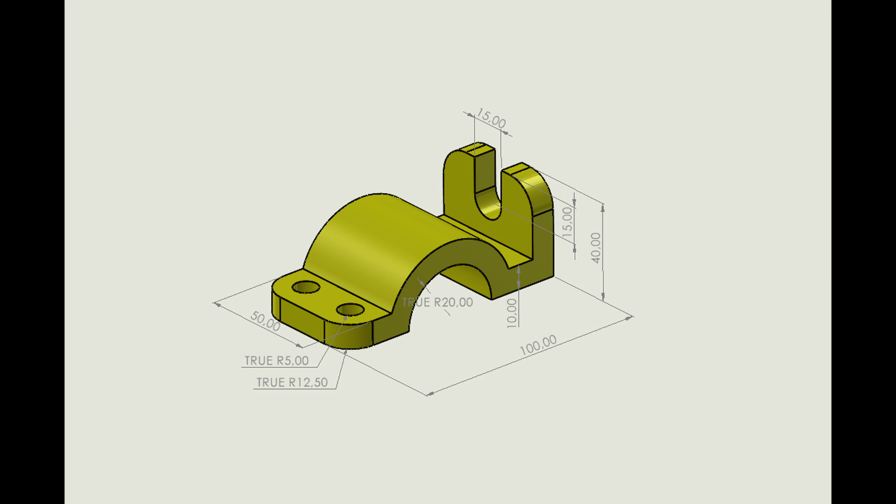In this lesson, we will model the shape shown in the visual and learn 2 new commands.

We'll start by sketching on the front plane to create the base shape. First, I draw the circle and the lines around it.

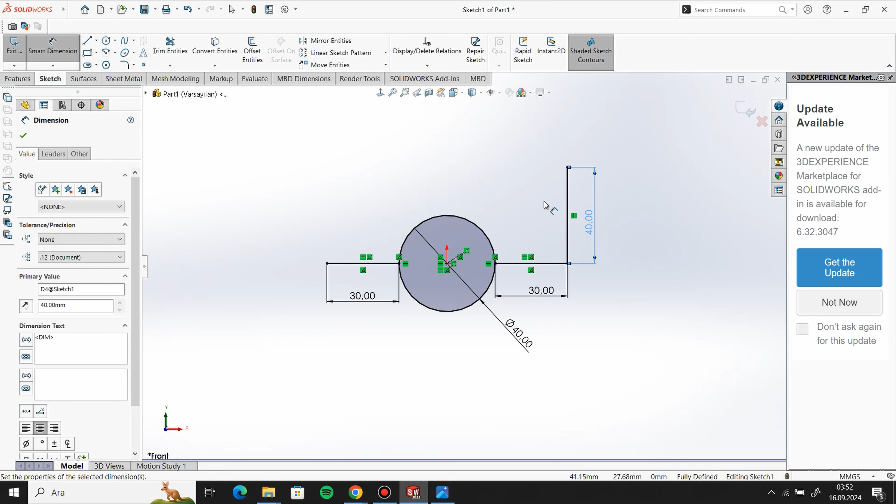There is no need to draw the upper part separately because we can use the offset command to move the lines. I click on the offset command and move the lines by 10 millimeters. I close the gaps between other 2 lines.

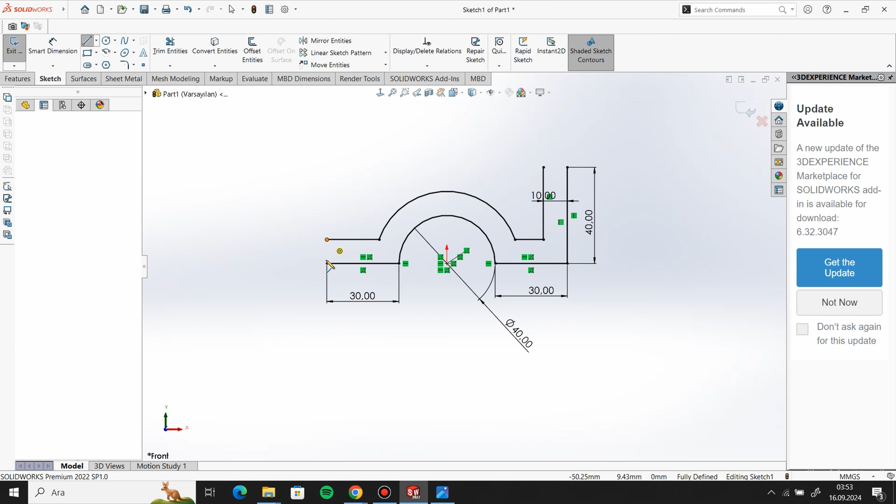Use the extruded base command, give volume to the shape, and choose the mid-plane option to keep it centered. I also set the dimension for volume.

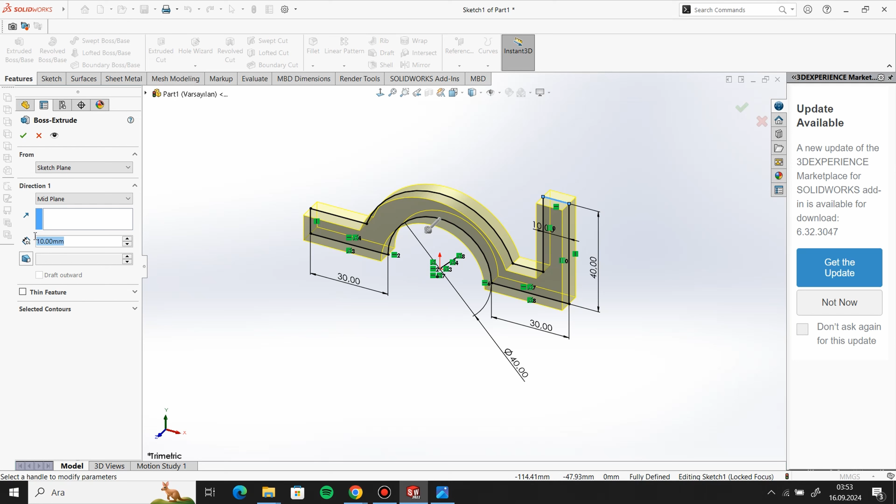Next, we will round off the corners using the fillet command. I enter the radius value and select the 4 edges to smooth them.

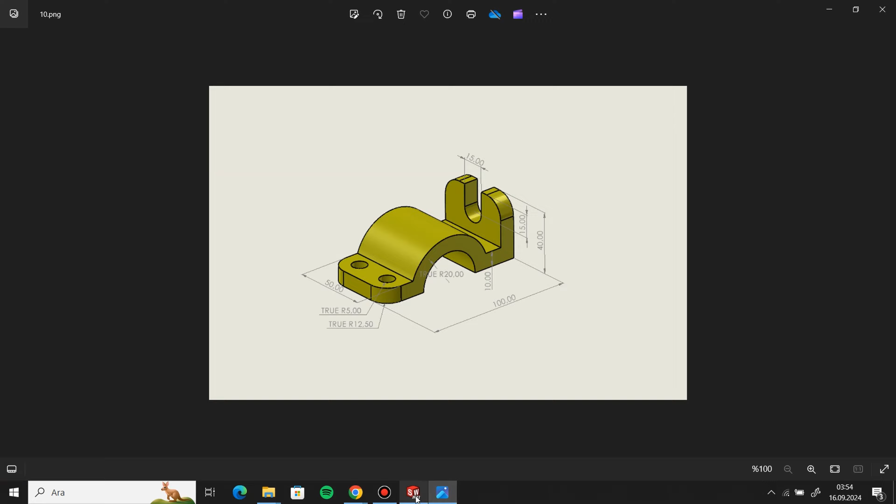Now, let's create the holes. I click on the sketch command and select the surface of the model. Then, I choose the circle command. To align the circles with the arcs, I hover the mouse over the edges, and the center points appear. After drawing the circles, I dimension them.

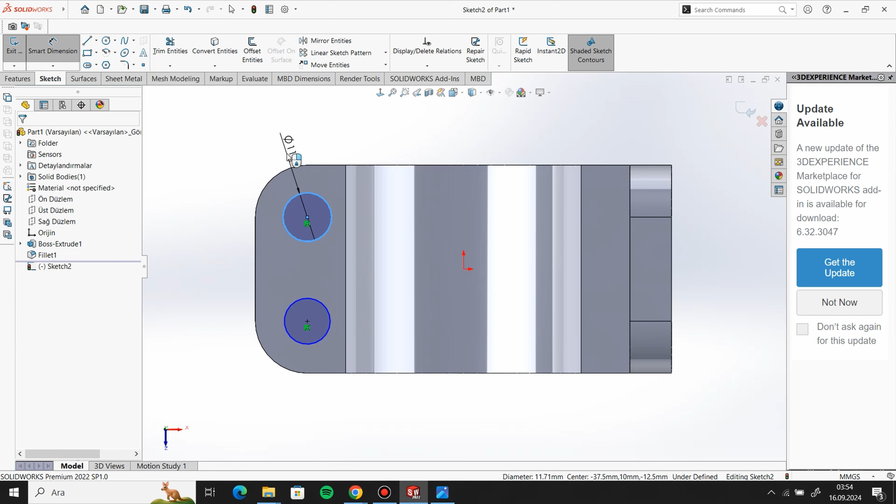I use the extruded cut command to create the holes.

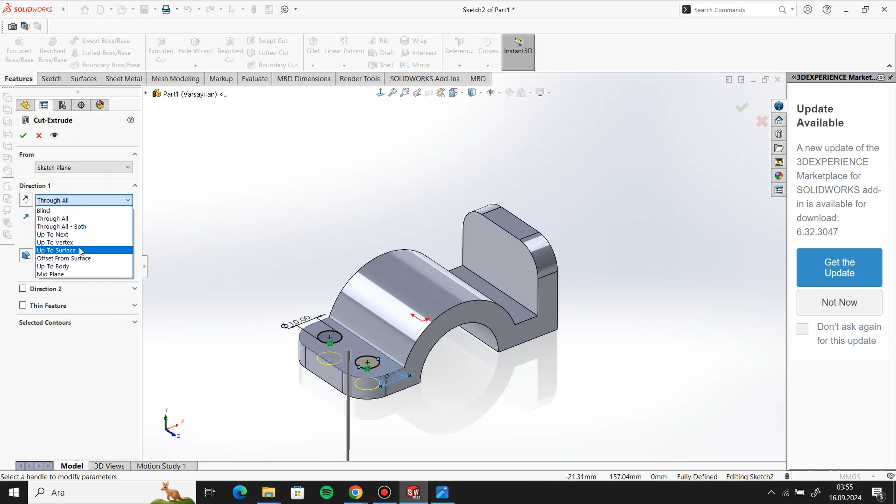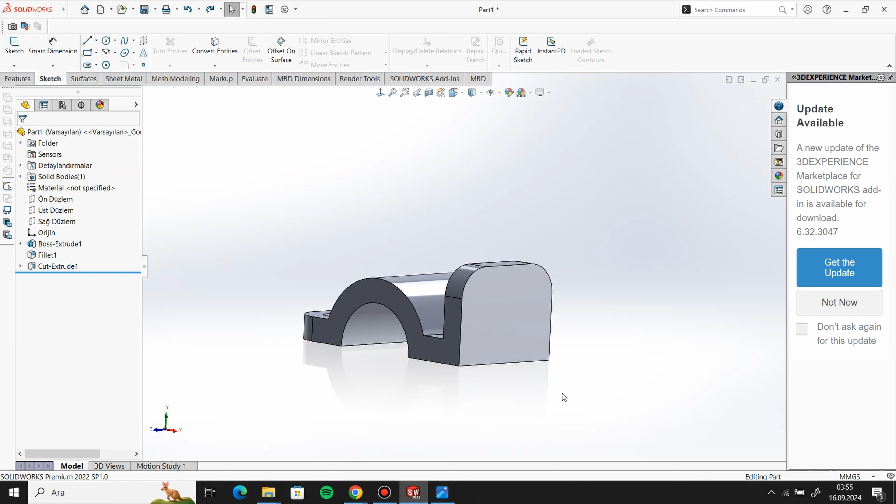Finally, we need to create the cutout on the right side of the model. I click on the sketch command and select the surface of the model. Then sketch the lines for the cutout based on the visual.

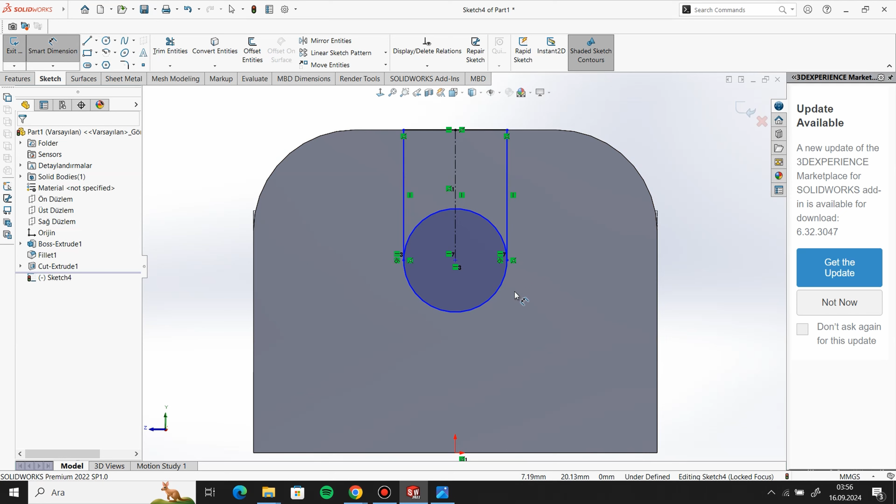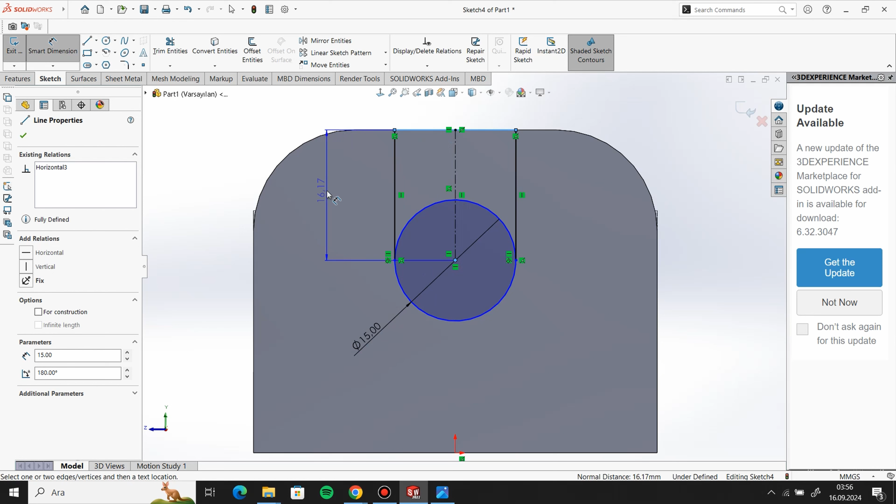Dimension the sketch. And use the extruded cut command to remove the material.

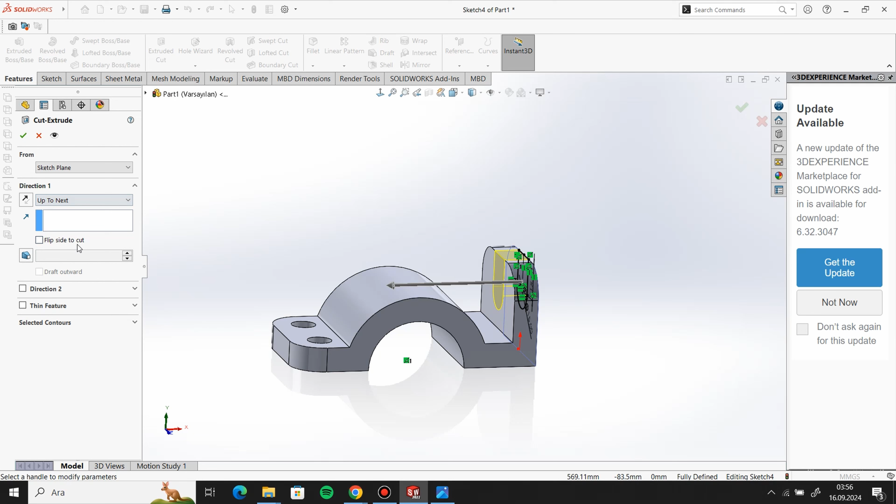As you can see, our model is now ready.